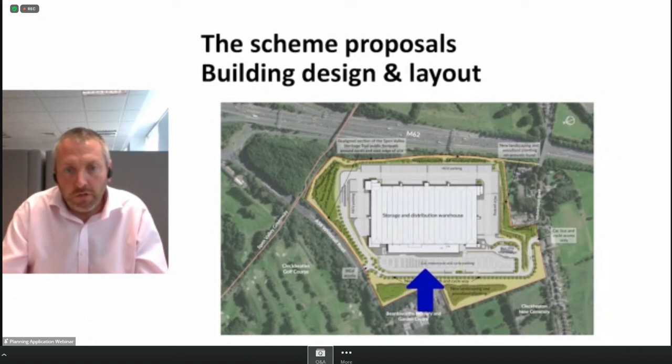The car park area includes provision for cycle storage, motorbikes, and then provides bus links and strong pedestrian links, all serviced by 2 access points, which Ian will pick up on later.

The building design itself is carefully considered to respond to both site-specific constraints and the internal operation. It is designed for the latest building requirements with strong environmental credentials. I'll leave Brett to cover off wider site elements and how the development sits within the landscape.

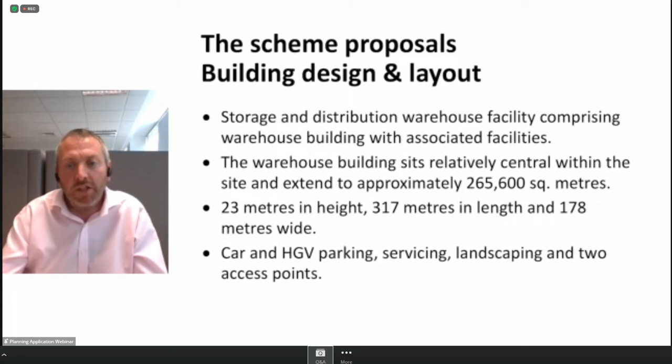Thank you, Simon. The principle of development in this landscape has been accepted by the local plan allocation for employment uses. Nevertheless, the team has developed various design and mitigation measures to address the impact of the development on landscape character and visual amenity. The iterative process of the environmental impact assessment, which has included producing a landscape and visual impact assessment, has resulted in several design and mitigation measures to lessen the landscape and visual impact of the development.

This has included site levels and earthworks, a green infrastructure of new landscape habitats, and the elevational design of the building.

Design and mitigation measures. Site levels. Consideration of how to locate the built development within the site has sought to balance the need for a level development platform for the building and at the same time to sensitively integrate the development into the site. This has included reducing the ground levels in the southern part of the site so that the built development, to include service areas, effectively sit lower. Bunds, ground modelling and woodland planting are combined to provide filtering and softening of views of the development.

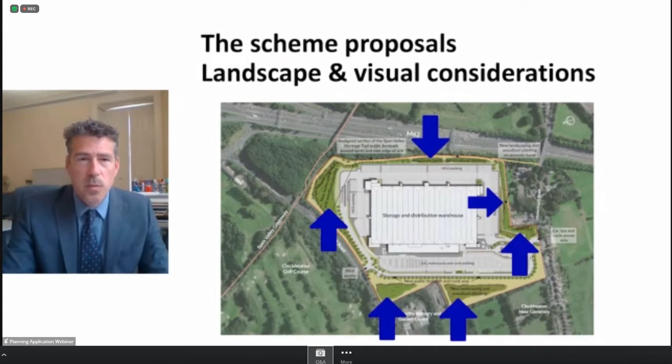This strategy is considered to be an appropriate design response to minimise visual impacts, and at the same time will deliver long-term benefits for biodiversity and landscape character. And now I'd like to hand you over to Ian.

Thank you, Brett. As you can see from looking at the plans in front of you of the layout, there are two accesses to the site. The one from the north onto the A58 Whitehall Road is for HGVs only, and all HGVs will come in from that direction.

Cars, motorcycles and cycles being used by staff and visitors will be able to access from both the A58, but also from the separate access to the south from Whitechapel Road.

HGV parking is located across the site, as you can see on the layout plan, and there's sufficient parking to accommodate all HGVs on site, so you won't get HGVs parking on roads around the site. Also on the layout you can see parking for staff and visitors, for cars, motorcycles and cyclists.

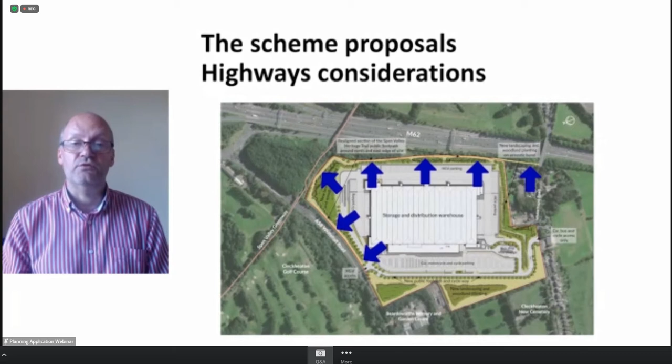The site also accommodates buses, which can be used at peak times of the year to bring staff directly to the site. There's an existing footpath across the site that will need to be rerouted, and there will be a new connection from Whitechapel Road to Whitehall Road running east-west.

Looking now at the implications of the site, the background is that the site was allocated for employment uses in the local plan. That followed modelling to look at the off-site implications of the site being developed, carried out by Kirklees Council and Highways England. The proposed development actually generates less traffic than the scheme that was allocated in the local plan.

Looking at staff shift changeover times, for any logistics developer these are outside of the traditional traffic peaks. You won't see traffic between 8 and 9 in the morning and 5 and 6 in the evening. Also, those shift changeovers won't coincide with the start and end of the school day.

Discussions are underway at the moment with both Kirklees Council and Highways England about the key transport issues around the site, including on the A58 and at the Chain Bar junction.

When the planning application is submitted, it will be supported by a detailed transport assessment setting out all of this work. In addition, there will be a travel plan which will encourage staff not to drive to the site and to use more sustainable modes.

There'll also be an operational management plan, a car park management plan, and a delivery and servicing plan that will support the proposed development. These are designed to ensure that the operation of the site doesn't have an adverse impact on the surrounding road network.

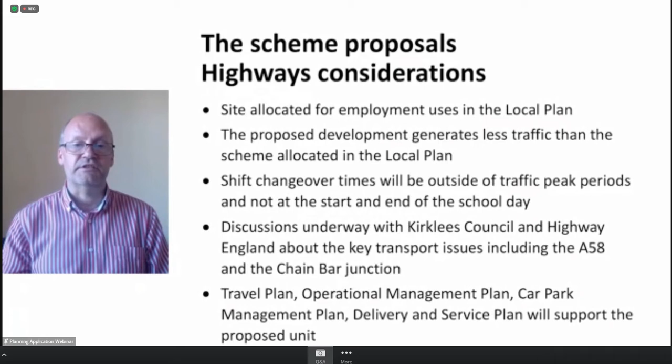Thank you, Ian. Our role is to manage the environmental impact assessment process. This is a level of assessment above what would usually be required for a planning application, and requires all assessments to be undertaken in a similar and comparable way so impacts can be measured. Mitigation can be included in the design process, and outcomes in respect to the environment are clear, regardless of which technical chapter you are looking at.

The impacts from the proposed traffic have also been assessed and modelled with respect to noise and air quality on the environment, and a suite of ecological surveys have also been completed to feed into this assessment work, ensuring the baseline environmental information is truly representative.

Once completed, the environmental statement will document all relevant impacts from this process and include a summary of those, along with any required mitigations summarised in one table. There will also be a non-technical summary detailing what impacts can be expected. This would sit alongside any other reports and documents normally required for a planning application.

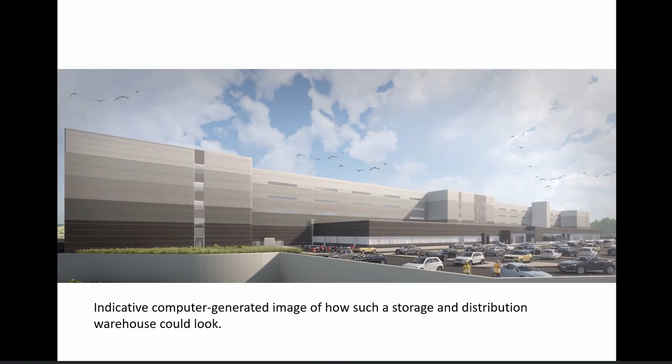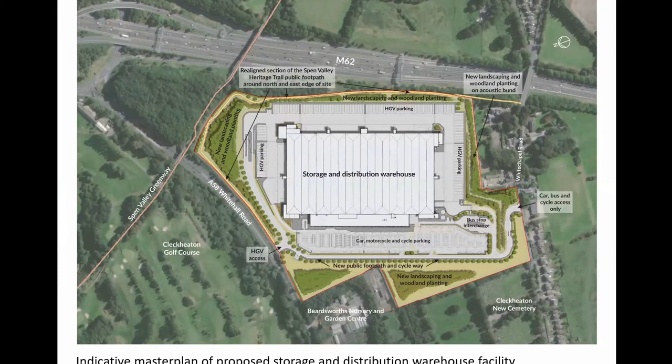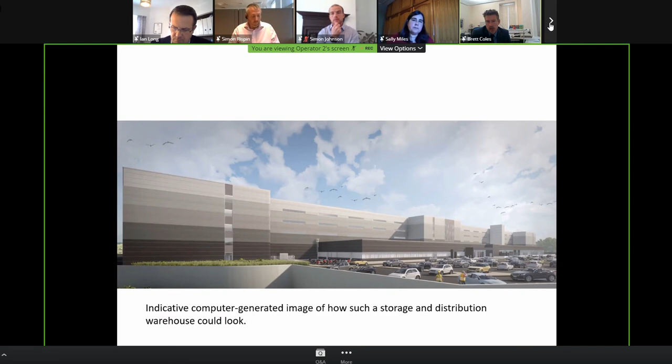As we've explained in the presentation tonight about the visual aspects of the building, we've done a lot of work as a team to integrate the building into the landscape using best practice measures. The colours and banding we're adopting in the elevational design have a huge benefit in minimising the bulk of the building in terms of its mass and scale—a commonly used approach that would be successful in this landscape. The other element is the woodland planting and tree cover we're providing around the perimeter of the site, which helps integrate the building into the landscape, particularly from wider areas.

We acknowledge we've got to address this through design measures—a combination of the building elevation, the siting of the building in terms of levels, dropping the levels in certain areas, and the green infrastructure of new planting all combine to minimise the visual impact of the building. I'd reiterate that this site is allocated for employment, so the principle of employment buildings of this type in this landscape has effectively been accepted through the local plan process. Nevertheless, it's important that we've developed these design measures to minimise the impact of the building on views and on landscape impact.

If I could just reassure everybody in terms of ISG and the construction process, health and safety: ISG treats health and safety as our number one priority at all times, and we pride ourselves on our impeccable record for minimal accidents and RIDDORs. We employ first-tier suppliers and subcontractors, and we scrutinise them—they undergo a level of scrutiny before we engage them. All our staff on site are trained in health and safety matters, and we have a designated on-site health and safety advisor and a team of health and safety and environmental support who continuously monitor and audit to ensure our site team upholds all of ISG's key principles at all times, and that we continuously communicate and work with the people in the surroundings and neighbours, keeping safety as our utmost priority. Rest assured, that is number one as far as ISG is concerned.

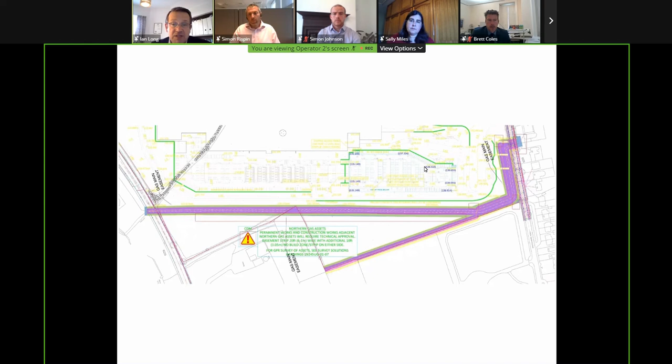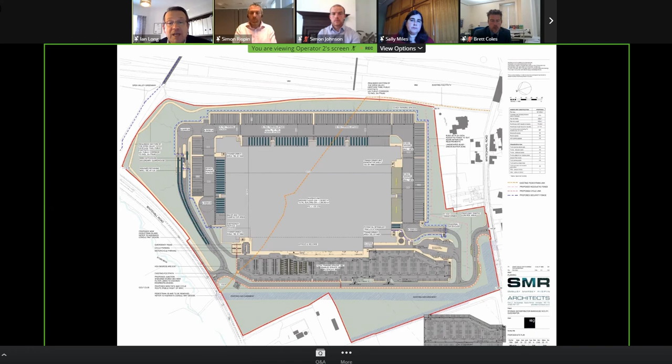As you can see, if I could have the following slide, please, there you go. As you can see on that particular drawing, the development has been designed to avoid this area completely. Any works undertaken in the proximity of these zones will be carried out in accordance with the guidelines issued by the controlling authority, that's Northern Gas Networks in this instance. So I believe we have that particular issue covered.

Thank you. Just to confirm, Northern Gas will be a consultee as part of the planning application process. So whilst we've been checking to ensure that we believe our design meets their requirements, the local authority themselves will satisfy themselves directly with those authorities that the proposal is appropriate and in accordance with their requirements. So that is something that will be picked up very carefully by the authority as well.

We've also had a number of questions related to shift patterns and the timings that lorries etc. will be accessing the site in relation to peak traffic times within the surrounding area. I think this was touched on earlier, but perhaps you could expand upon that a little bit more, please. Ian, would you be happy to pick that up?

Yeah, I think the first thing to say is this facility in terms of HGVs would operate 24 hours a day, so there will be HGVs coming in and out via the A58. In terms of shift changeovers, all occupiers of units like this generally operate 2 or 3 shift patterns. We don't know the precise times of those, but they don't move their people around in the peak periods, because the buildings themselves don't operate 9 to 5 like an office. So you get different periods of activities, and therefore the shift patterns go around those activities.

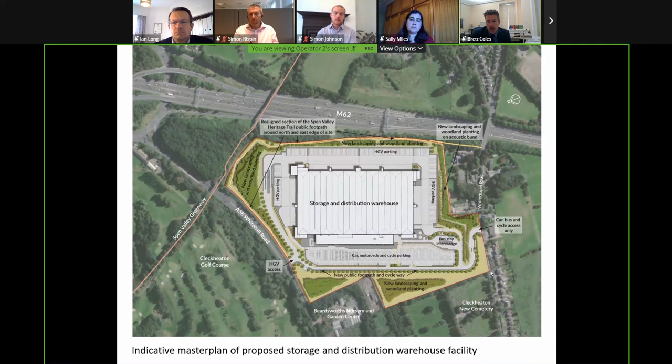So as you can see on Whitechapel Road, we have a very broad green frontage of new habitats there, which will include woodland planting and trees. Initially the woodland planting has to be young planting to follow guidance on establishing woodland, and then within 10-15 years the woodland planting would have established to about 10 meters in height. That's the normal standard growth rate for trees. We're also adding hedgerows and a number of trees on Whitechapel Road. The additional element we're including is to repair the existing stone wall, which is in a state of disrepair on that edge, so a new stone wall would go in to provide a sympathetic edge to the road.

I think hopefully that covers the question, Bob. Thank you very much.

Is there a proposed BREEAM assessment for the unit, and what level are you aiming for? I think Simon picked that up within his statement, would you confirm, just so I don't get it wrong, Simon? Yeah, happy to. BREEAM covers a number of elements in terms of sustainability and energy, and things like making sure cyclists have showers. There's a sliding scale, and our target would be very good.

Thank you very much. And then with regard to contractors during the construction period, what is the plan for contractor parking during the construction phase?

Ian? Of course. Yes, as is the case in these schemes, what we aim to do in all instances is, as we progress onto site and as works proceed, we create hard standings for designated material laydown, contractors parking, etc., and site welfare facilities. So we will develop areas that are hard standings in the final scheme, the car parks and yards, on which we can then place our welfare facilities and increase our parking. The intention is always to keep all our contractors parking on site as works proceed. Obviously we encourage car sharing, vans and things like that to minimise the number of cars arriving daily. Our scheduling of the works and construction will deal with the natural increase of vehicles arriving on site.